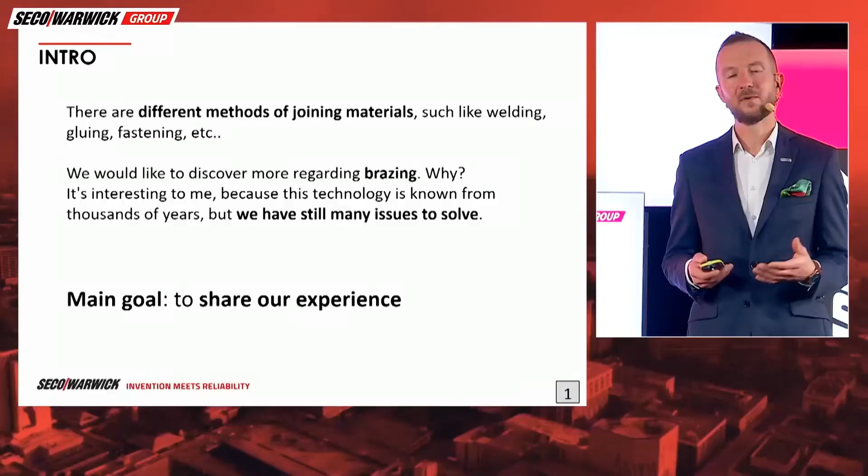What can we say? We have different methods of joining materials together: gluing, fastening, welding. But brazing is a technology known for thousands of years, yet we still have many issues to solve. Remember why we are here today: to share our experience and knowledge between us and between you, and I hope you will be happy. If you have comments or questions, please use the chat window and type them in. We will be happy to have such interaction with you.

We have a great team of experts. And who is an expert, really? I found a nice explanation according to Niels Bohr, that an expert is the person who made all possible mistakes in a very narrow field. It's a little discussive for me, so I'd like to present my personal view: an expert is a person who has experience and knowledge, but is able to share this knowledge and experience between different people. A true expert, for me, is someone I can call and always get an answer. Please remember this as we speak with our experts.

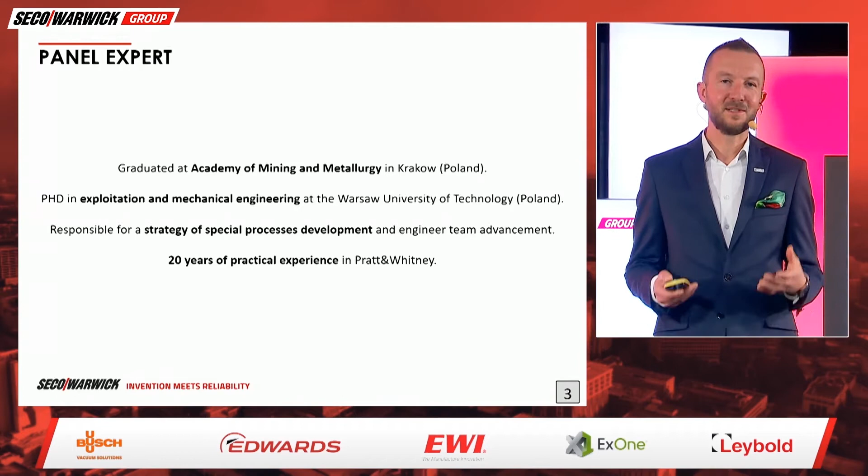So who will be in our discussion today? The first person graduated at the Academy of Mining and Metallurgy in Kraków, Poland, with a PhD degree in exploitation and mechanical engineering from Warsaw University of Technology. Today she is responsible for strategy of special processes development, with 20 years of practical experience. Ladies and gentlemen, please welcome Irena Dul.

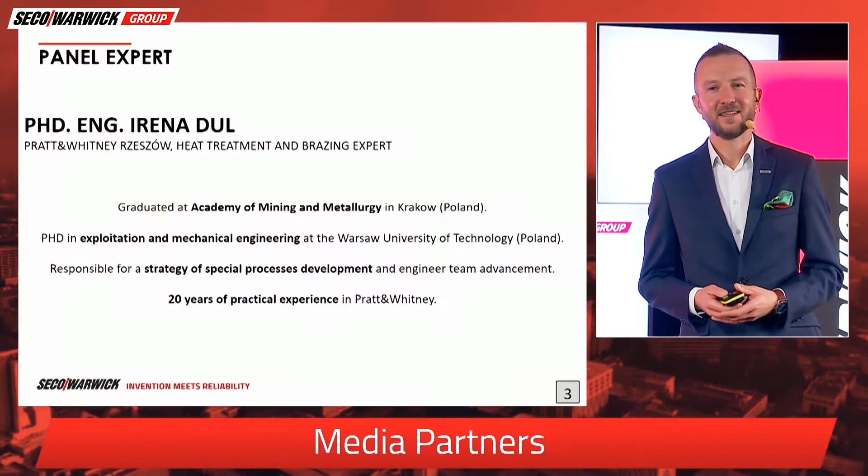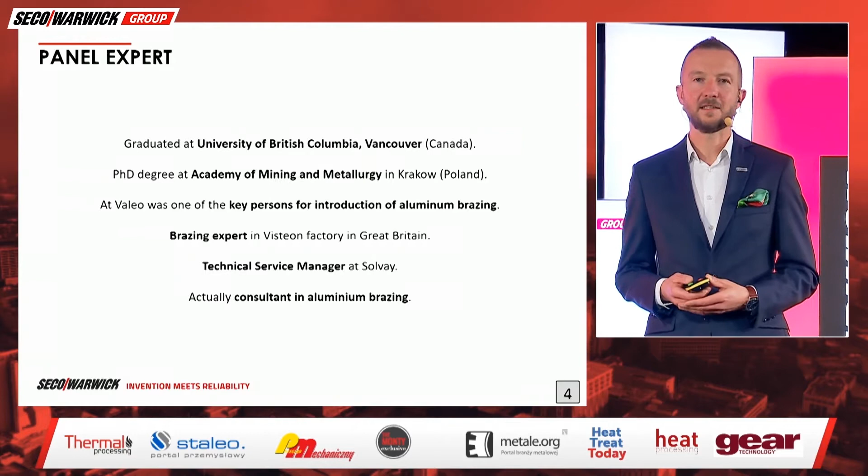The second person graduated at the University of British Columbia, Vancouver, Canada, with a PhD degree at the Academy of Mining and Metallurgy in Kraków, the same university again. At Valeo, he was the key person for introduction of aluminium brazing, then brazing expert at Visteon in Great Britain, technical service manager at Solvay, and today a consultant in aluminium brazing. Ladies and gentlemen, please welcome Leszek Orman.

Hello, Leszek. Good to see you. Hello. Hi, nice to see you. Nice to talk to you. One small remark about the definition of Niels Bohr. Please do. I think there's something in it because I've made many mistakes in my professional life — perhaps not every possible one, but many. I agree, and from my point of view, if we made a mistake, it's always the best lesson for the future. So let's keep it in this way.

Thank you, Leszek. And to complete our great team, please welcome the third person, who graduated at the Academy of Mining and Metallurgy in Kraków again. His brazing experience started at Listeman, then he joined the Warsaw Institute of Aviation, and then General Electric Company for brazing applied on gas turbine repair. It was quite the beginning of our commitment - a little strange for me at first, how to braze and repair the blades, but now I have more information about this. Today he is a global brazing engineer at Danfoss company. Ladies and gentlemen, please welcome Adam Gaik.

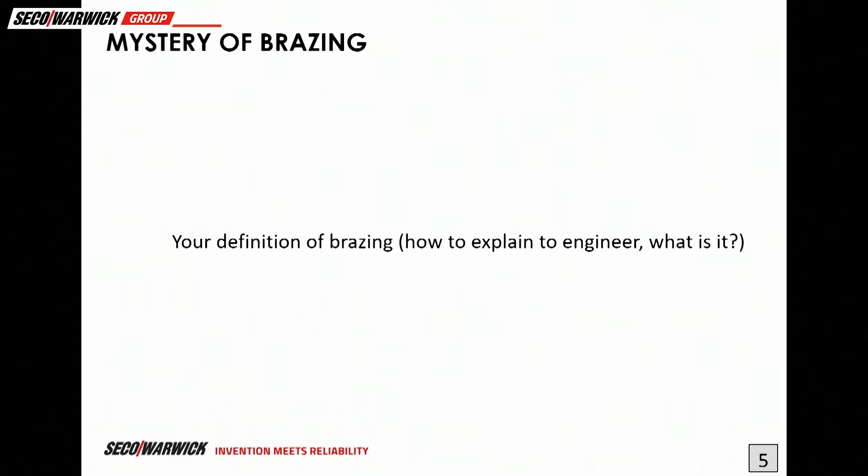So now it's time to start our technical discussion with the first question. We already discussed some things beforehand, so please remember, some questions are partially prepared, some are surprising. Let's start with the first question, because I believe we have guests who are beginners in brazing technology, and some who are real experts - it's always discussive. Let's talk about the definition of brazing: what it is, how to explain this to engineers. Leszek, can you start by saying something about this? How do you see this aspect?

Thank you. Well, brazing is a process where we join metals using a molten filler metal. On melting, the filler metal spreads between the closely fitted surfaces, and during that process some metallurgical phenomena take place. One of the most important is diffusion between the base metal and the filler metal. Diffusion means that some atoms from the base metal go into the filler metal and vice versa - some filler alloy atoms go into the base metal. Upon cooling, a metallurgical bond is formed. A very important point in the definition of brazing: the filler metal melting temperature must be below the melting range of the metals to be joined.

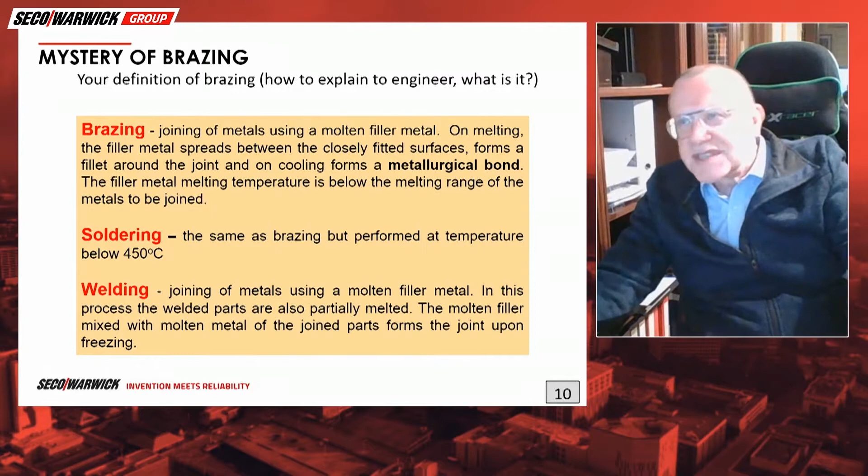If you remember, I guess I'll show you a very short movie of a furnace, which would visualize the process of furnace brazing, because normally we cannot see it since it's inside a big furnace. Before I present this movie, if you remember our pre-discussion before this panel, Irena mentioned that the critical issue is always to remember that brazing is a metallurgical bond. Am I right, Irena? Yes, exactly. It was good to remember.

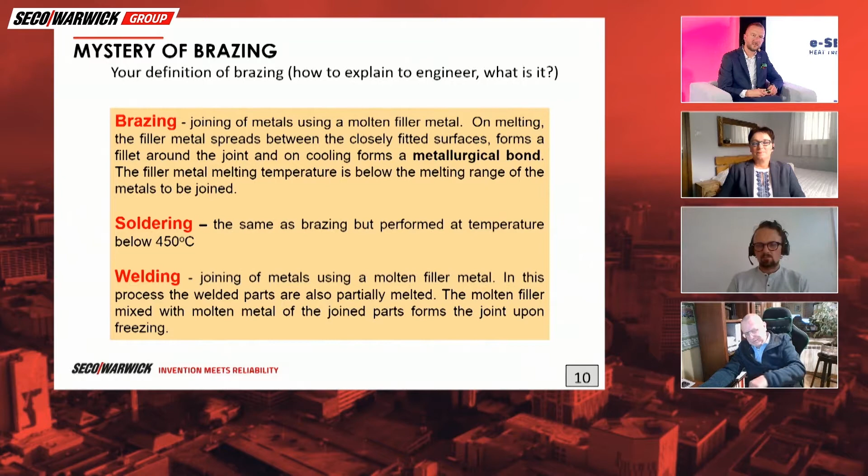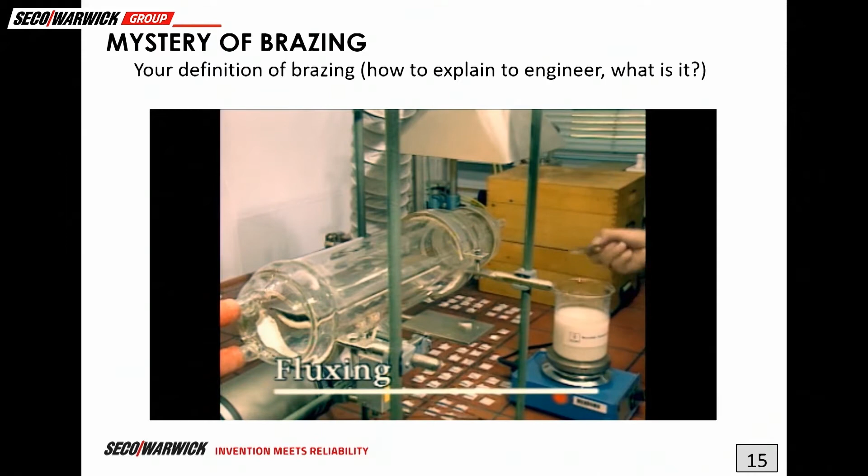In this movie, we are going to show how two elements are brazed - a small square-like coupon, 20 millimeters by 20, with an angle. For that process, we must also use flux, because flux is a factor which cleans the surface and prepares it for the filler metal to flow freely.

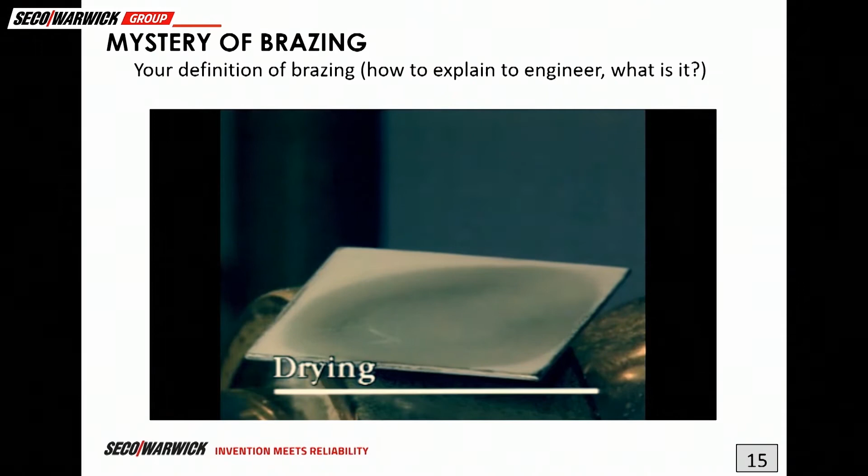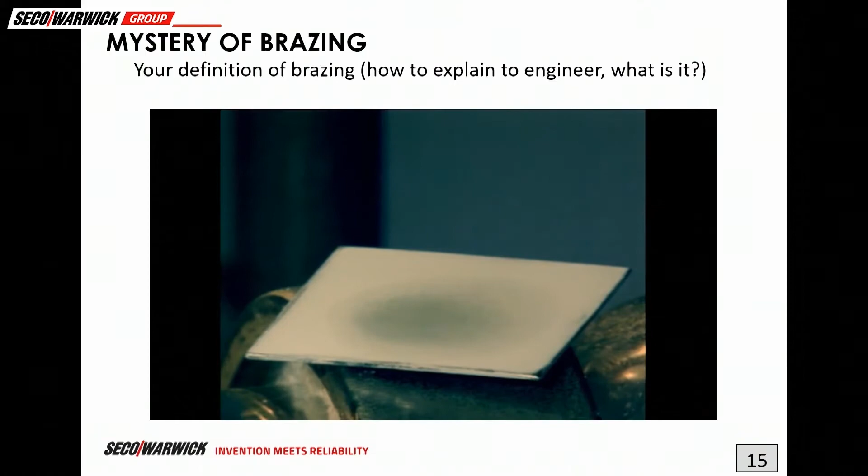Here you can see how the flux slurry is drying on the surface of the part. It's a real-time movie, and the coupon is put on top of the furnace, so you can see how it dries - this is laboratory conditions, a laboratory furnace. Flux is a substance that looks like white powder, and when it's dry, it covers the surface quite uniformly.

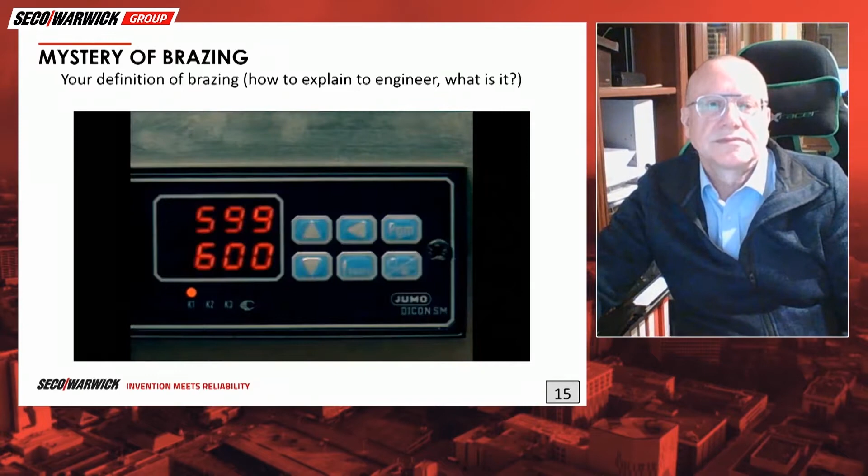Then we put the angle on top of it with a small piece of filler alloy, and we put the whole assembly inside the furnace. We set the temperature, which in the case of aluminium is 600 centigrade, and we run nitrogen through the furnace - it's important to have an inert atmosphere inside.

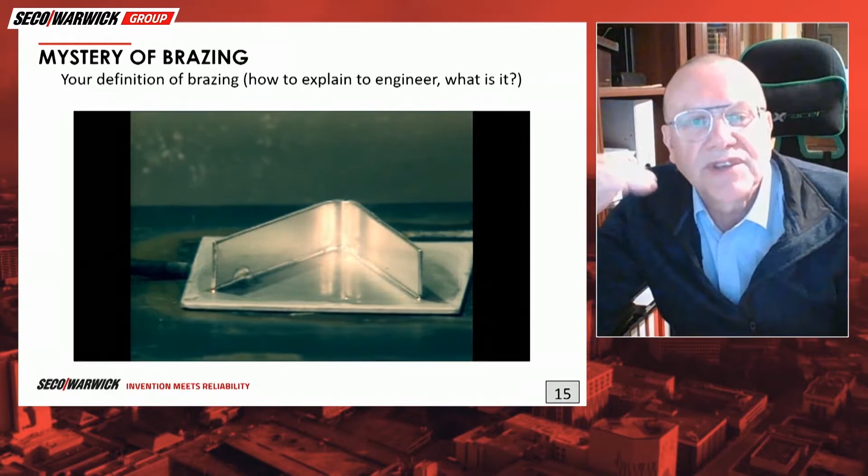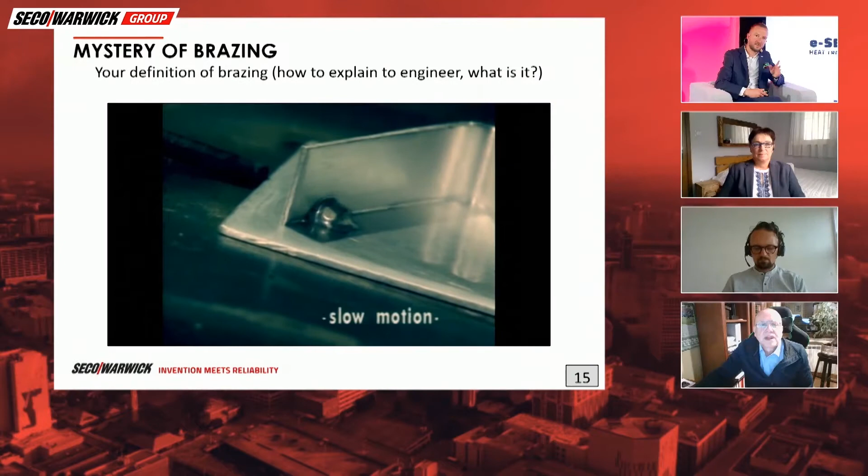Now the flux has melted and started preparing the surface. Now the filler alloy melts and flows, forming a joint. Here it is in slow motion. I must tell you, the first time I saw this movie, I was really surprised how fast it is - the filler flows and fills the joint.

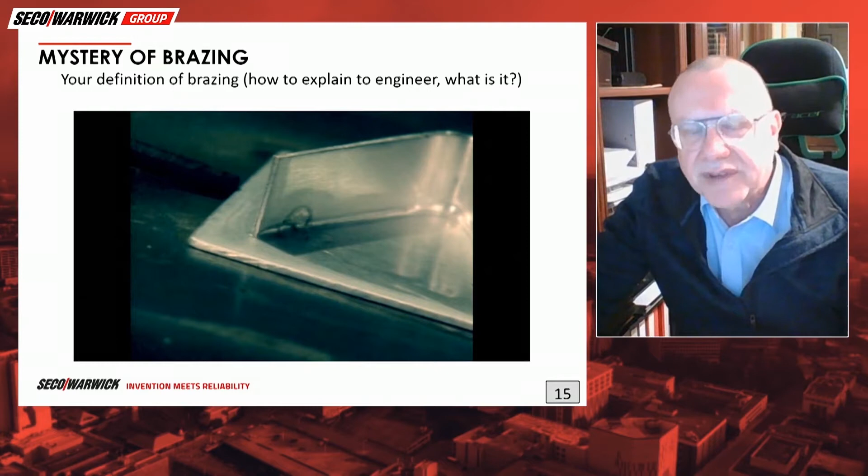Please note - now the movie is stopped, but that's okay. On the upper side of the angle, we can see a shadow, and this shadow shows how flux spreads on the surface, even against gravity. This is the key factor for success in brazing - flux must prepare, must clean the surface, must remove the oxide from it.

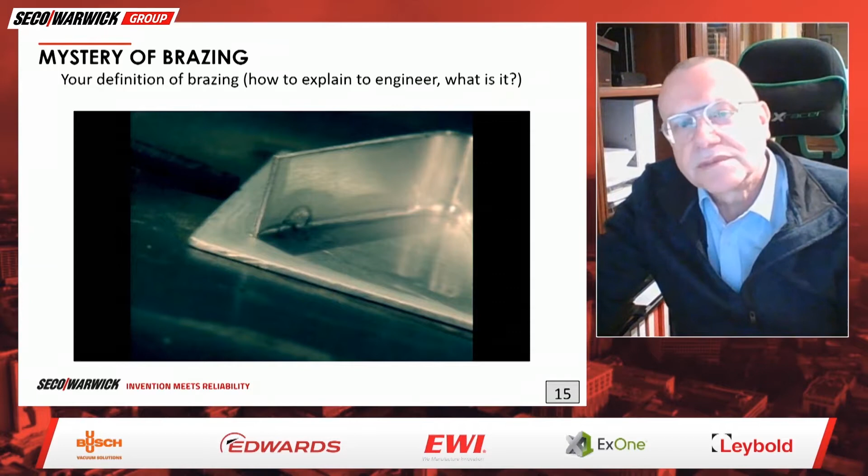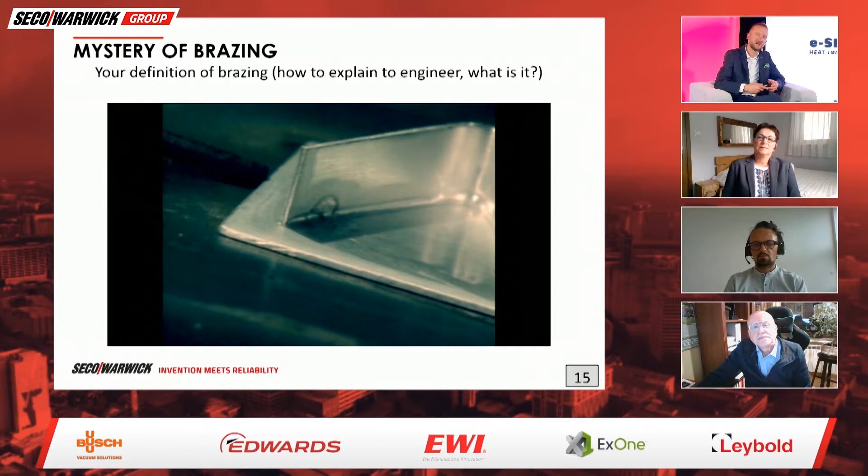Leszek, thank you very much for this explanation. What I wanted to say is that when I first saw this movie, I was extremely surprised how fast the capillary force keeps the brazing alloy inside the gap.

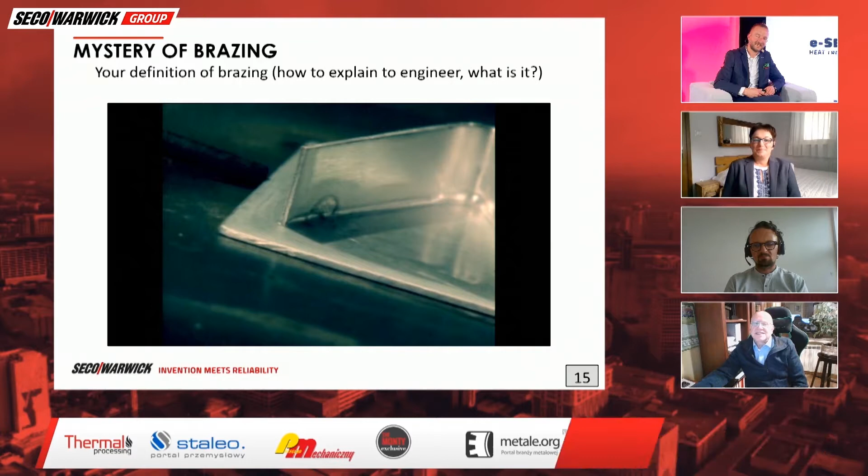This is an additional question to everyone: do you have any idea what is the speed of the brazing alloy when brazing occurs? Do we have any approximation? I never measured it, but even on this movie it was fast. I don't think we know much about it. Well, it is fast, but the real speed of brazing is actually determined by the speed of flux spreading, and that is not so fast.

Yeah, I think it's also determined by the thickness of our gap. But let's continue our discussion. Irena, Adam, have you seen anything like this before during your brazing experience? Yes, yes - maybe not exactly this movie, but I saw this during the process. Some of the processes are not done in the furnace, so you can see them outside, like here.

Yeah, induction brazing. The space is open, and you can see such phenomena.

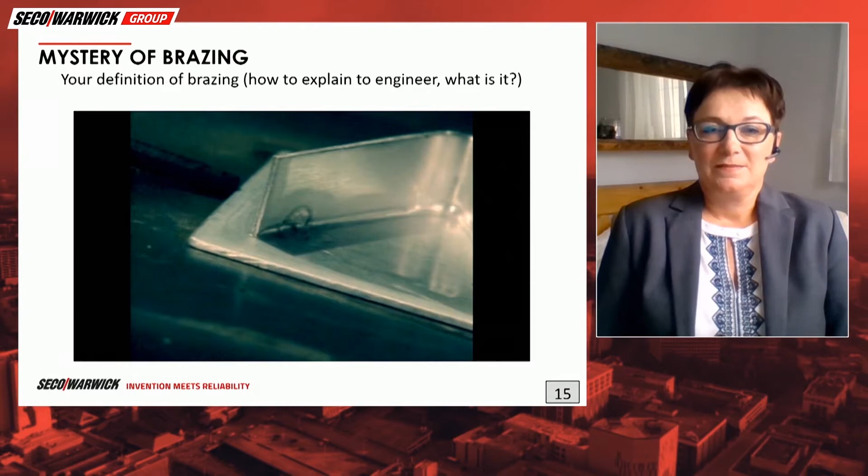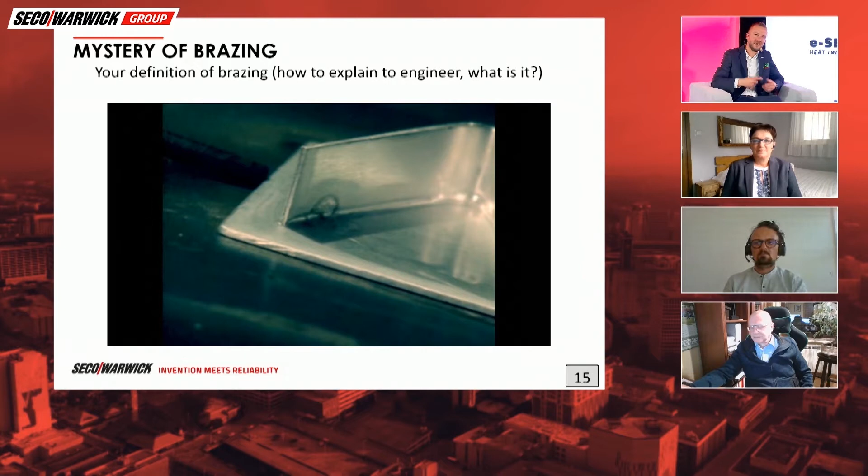It's good you mentioned induction, because it was already explained about the laboratory and the brazing furnace. But you mentioned induction - we have different methods of brazing. And when I said this is a technology known for thousands of years, we can find nice jewelry made in brazing, even in the Egypt museum. But if we can say something more about the different methods of brazing, and divide them in some way - Adam, can you do us a favor and explain it?

Yes, so brazing is a very versatile and broad technology, and you can divide it in many ways. What I did is divide it by the heating methods - what kind of heating methods we use to heat up the parts and join them. One of the oldest and most basic methods is torch brazing, where we can use different fuels to burn the torch. It's pretty versatile and manual technology, but it requires a lot of skill from the operator. It's a little bit like TIG welding, maybe a little easier, but it still requires skill and experience to use.

But can it be automated also? Yes, and there are a lot of automated machines using torch brazing.

Another package is furnace brazing, because we can have vacuum furnaces and continuous belt furnaces. They operate a little differently. Both types use some kind of protective atmosphere. In a vacuum furnace, we have much cleaner atmospheres because we can use vacuum or gases like nitrogen, hydrogen, argon - I forgot about argon there - but you start with a vacuum at the beginning, so the atmosphere you introduce is much cleaner. In continuous furnaces, we can have endothermic, exothermic atmospheres, and dissociated ammonia and nitrogen-based atmospheres.

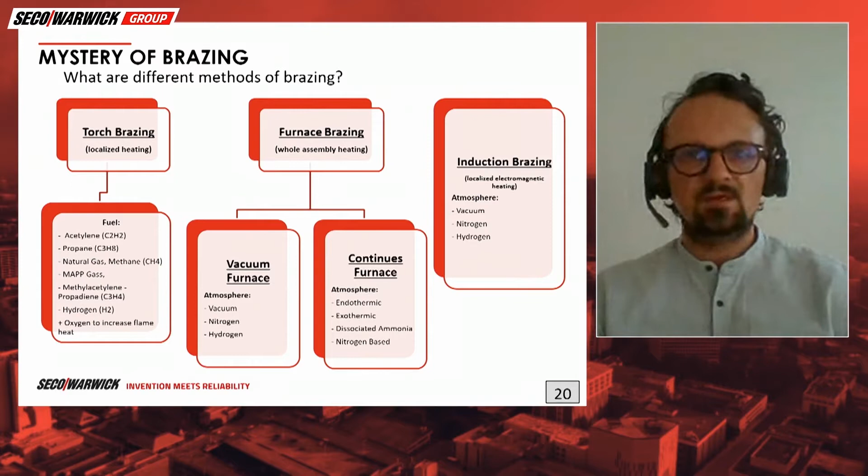You can control the process a little bit better, but it has some drawbacks - induction heating is very localized, so the joint is never heated as uniformly as in furnaces. The same situation happens with torch brazing, where we locally heat the parts. Of course, you can heat a wider space with the torch or induction, but that requires a different tool or technique. With the furnace, you heat the whole part, and the heating is very uniform, with good heat distribution, which is quite important for brazing.

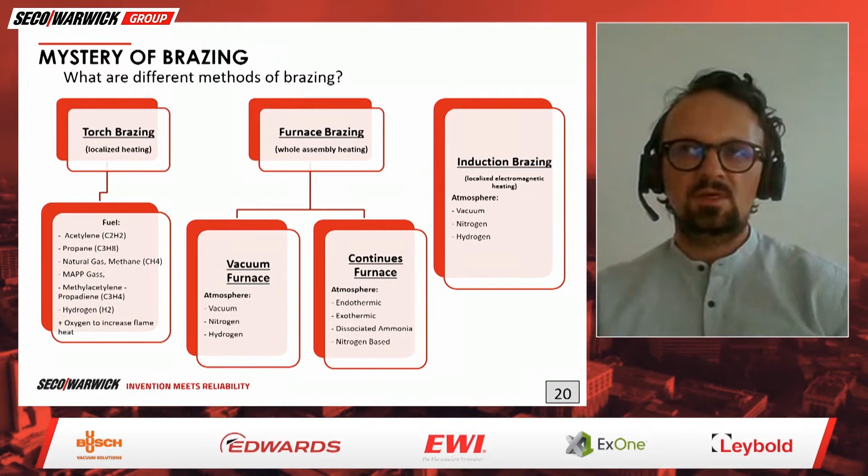As you may expect, I am a big fan of furnace brazing. Sometimes it's a benefit, sometimes it's a disadvantage, to heat the complete component together, not only the brazing place but the entire element.

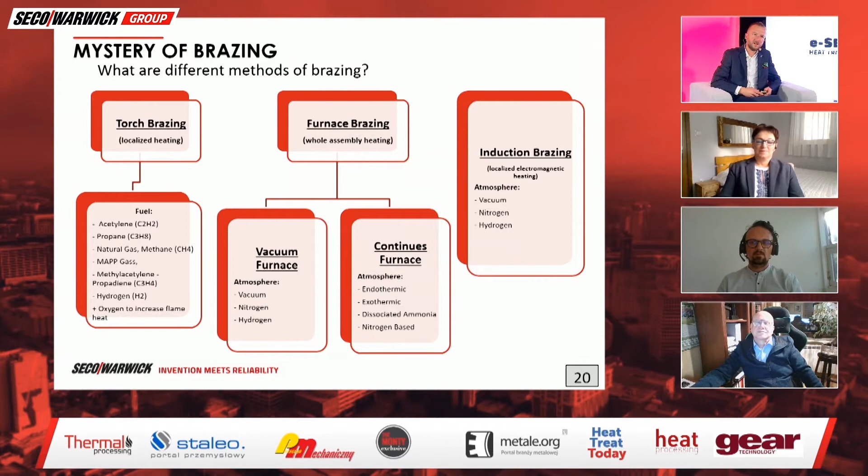But have you seen any component where, for the same part, it's possible to braze with torch brazing, furnace, and induction without any issue? Have you seen something like this, or do you not have an example?

Yeah, some in my current company where we're producing valves - some of the valves could be done with all of these methods. It depends on the size and volume we want to process, so it could be done with induction, torch, or vacuum furnace. Not all products, though - it depends on the base material we're joining - but you could use all of them on some products.

I'm asking because, of course, I would... Yeah, please, Irena. I would also like to add that induction brazing may be problematic, because sometimes the design of the coil to heat the material can be a little complicated, and sometimes furnace brazing is easier for such applications, to avoid a very complicated coil.

What do you think, Adam? Do you agree? I just heard it partially, I didn't hear the whole sentence. So Adam, I don't hear you. Yes, that was the problem. We will try to improve our connection. Irena, please repeat only to Adam.

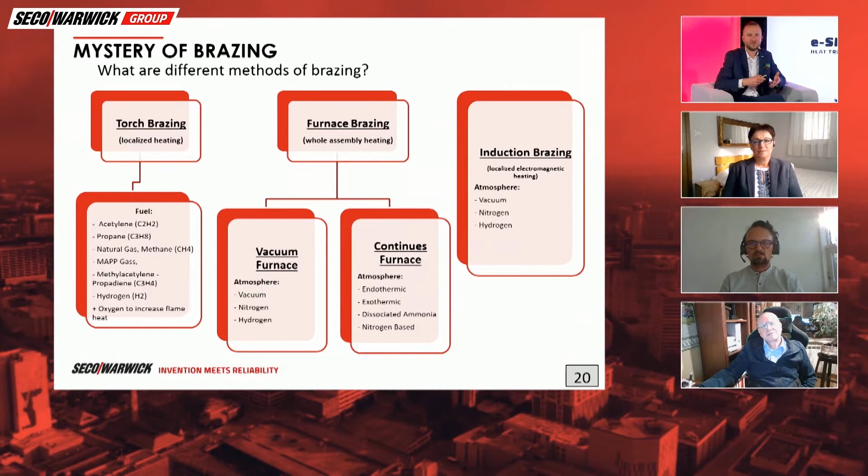Yes, thank you. And what was interesting to me was something explained by Irena, that the design has to be changed or prepared, especially for the different brazing methods. According to my experience, it's a really great challenge to have the ready produced part and then start to do brazing. Many times I see a lot of different points of view between the designer of the components and the people that have to braze these components. Can you say something about why brazing instead of welding, and which technology is for what kind of applications?

Irena, it's your turn, please share some of your experience with us. In my point of view, there is no issue about which process is better, brazing or welding. The question is which process is better for the application we have.

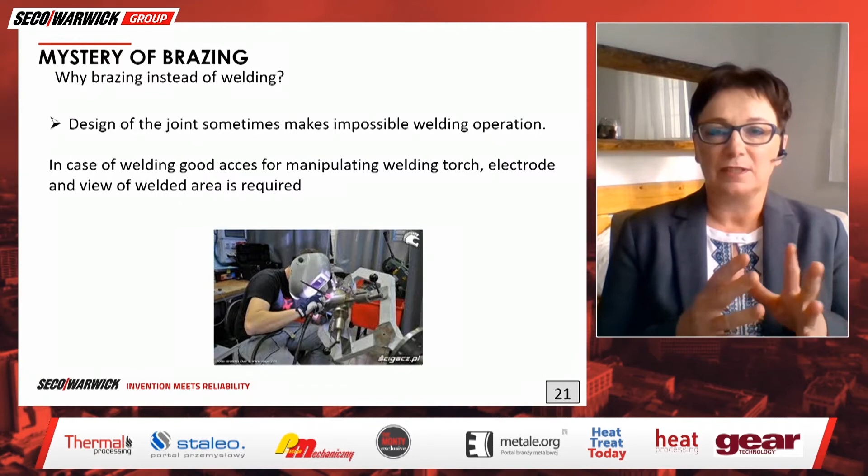Sometimes the design of the joint makes welding operation impossible. In case of welding, good access is needed for manipulating the welding torch or electrode, and we also need a very good view of the welded area. Generally, more access is needed for welding operation. So in case of limited space, brazing is easier to perform and is chosen more often than welding. So the design of the joint and limited space is sometimes better for brazing than for welding.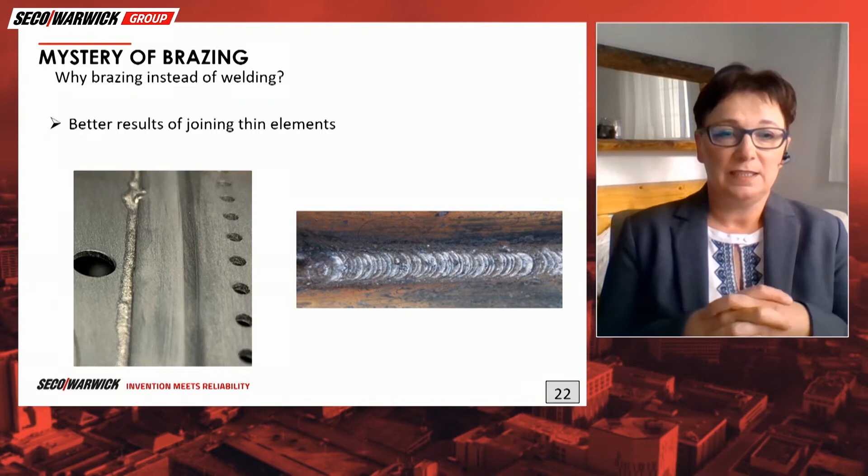Generally, for thin parts, as you see on the left side of the picture, there is a brazed joint. You can see that it's very smooth, very thin, and the quality is very good. Next slide, please.

The next advantage of brazing is the possibility of joining different materials. Welding process is dedicated only to metals. Using the brazing process, we can join metal with ceramics, for example. Of course, we have to use a special type of brazing filler metal, active brazing filler metals, but in that case we can join completely different materials with completely different properties and different coefficients of thermal expansion.

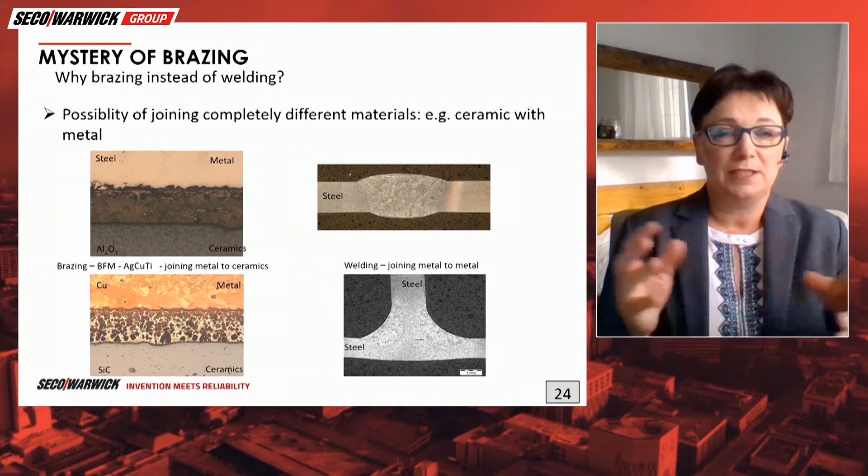And the last issue is the economic aspect. Brazing processes are generally a little bit cheaper than welding. Especially in the case of furnace brazing, we are able to do hundreds of joints at the same time, in the same operation. And the brazing process can also be combined with heat treatment. We call this concurrent heat treatment.

In parallel, of course, yes, why not. In parallel, exactly. As I showed, in that one segment is brazing, the second is concurrent heat treatment. Of course, not every brazed joint requires heat treatment, it depends on the role of the joint, the mechanical properties of the base metal, etc. But in aviation, the industry that I represent, such processing like heat treatment of the brazed joint is necessary. We do it for all parts we braze. Due to the fact that only one heating and one cooling segment is done during this concurrent brazing and heat treatment cycle, we also have less distortion.

In general, the brazing process doesn't require as much energy as welding. And even with induction flame brazing, the deformations are smaller than during the welding processes.

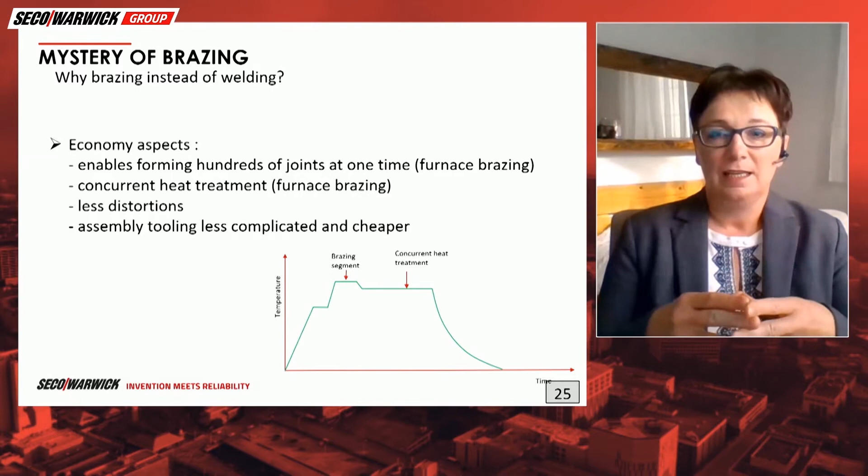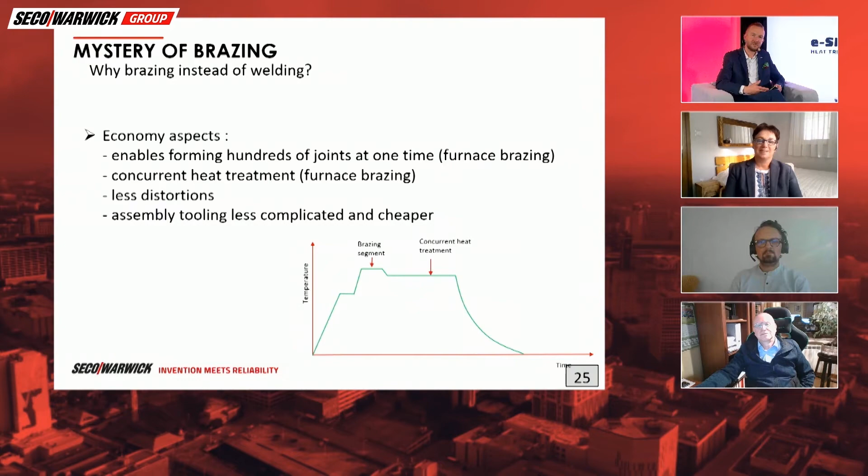When you explained that, I was just wondering if we are in the correct place, because our seminar is dedicated to heat treatment, and we try to discover the secrets of heat treatment technology, yet we speak about brazing, which is very much connected to welding. And you represent a person who works in the department of heat treatment and brazing. So this is sometimes... Yes.

In our factory, we do only furnace brazing. So the people who are responsible for heat treatment are dedicated to that process - the welding engineers are a separate group, and the brazing and heat treatment engineers are my group. Exactly, so I am responsible for both heat treatment and brazing. But this is a fact, in many companies I see brazing included in the general heat treatment department or something like this.

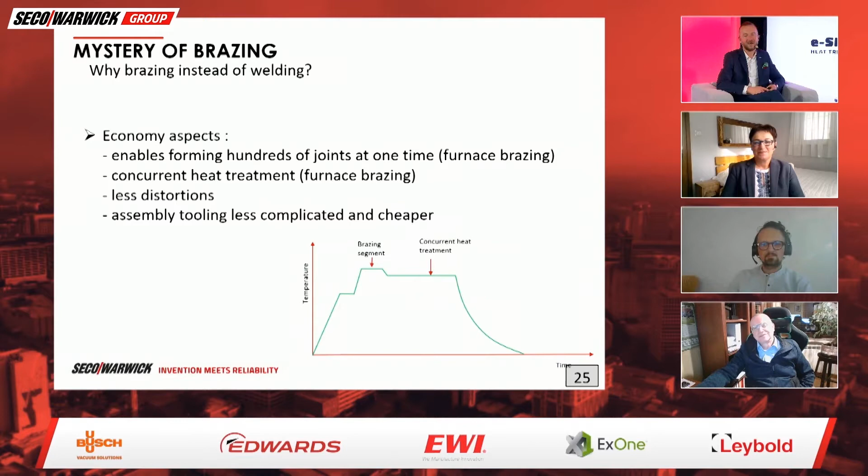Just before this discussion panel, I received a question, again maybe not for the first time, about the possibility of mixing different brazing processes in the same furnace. For example, having some heat exchangers brazed by copper, and whether it's possible to also braze heat exchangers with nickel in the same equipment, or even more sophisticated, or let's say a stranger requirement, to use the same furnace for stainless steel brazing and aluminium brazing. Maybe you can say something about this aspect, Adam.

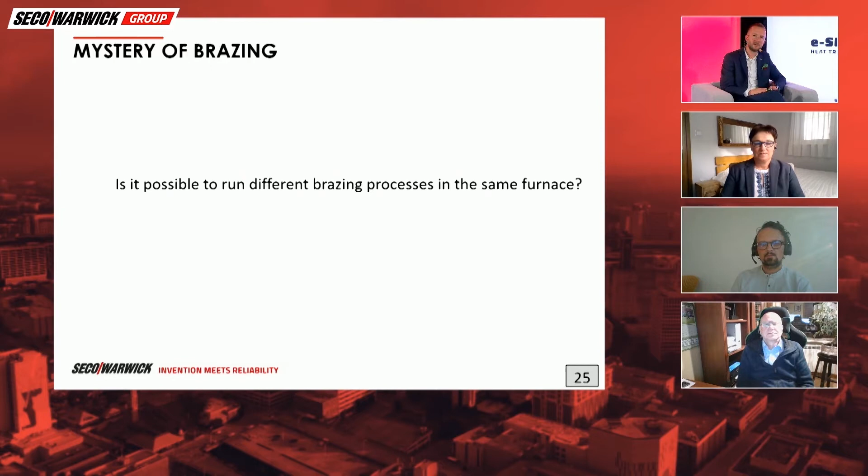Yes. So the answer is yes and no, because it depends. When we want to mix parts made out of the same base material - what do you mean, that we want to braze stainless steel with copper and stainless steel with nickel? The answer would be yes, you can mix that.

However, after the process with nickel, it would be good to make the burnout, which is the process of just burning out the leftovers of the nickel, before brazing with copper. And it depends on the nickel alloy, but one of the most popular, BNi2, has a lower melting point than copper.

Now, if you want to mix different base materials in the same furnace - for example, stainless steel and then aluminium - the aluminium would require a little bit different furnace because we have totally different melting points of the base materials. The other thing is, if you would like to braze brass in a vacuum furnace, it's the same - no, because you cannot braze brass in a vacuum furnace due to the evaporation of the zinc.

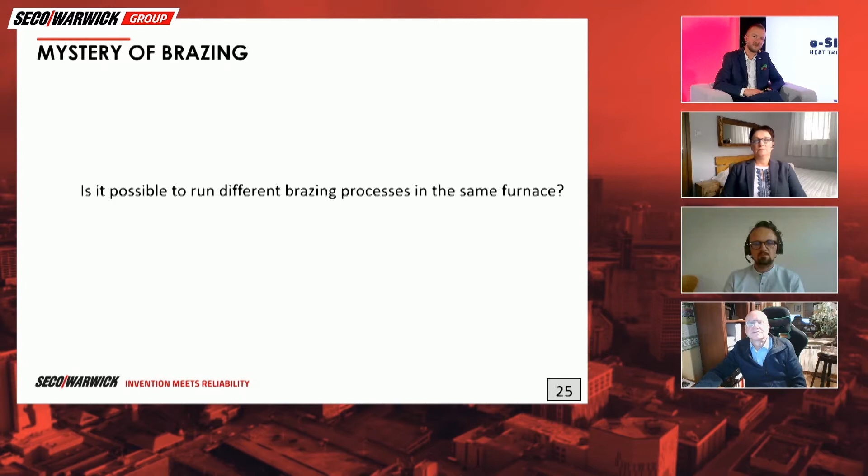So as I said in the beginning, it is possible, but sometimes from the economical standpoint it doesn't make sense. Of course it's better to have a dedicated vacuum furnace for one process, then you don't have to make these burnouts and remove the unnecessary leftovers during brazing. So the answer is it is possible, but it depends.

It depends, exactly. Adam, thank you so much. The next question we have. May I have one additional remark? Please do, Leszek, on condition it will be short.

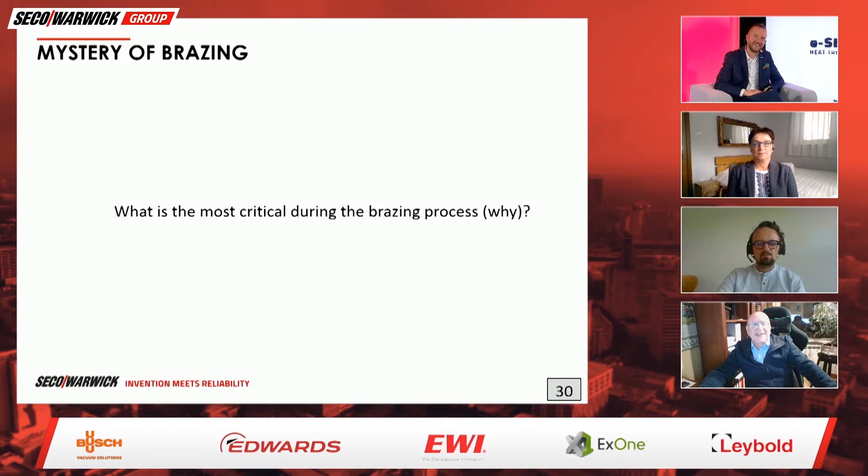This remark is not really about the furnaces, but about the process. If you braze aluminium and copper, and in the same factory you have production in copper and brass, make sure copper never gets into the production hall of aluminium. I've seen cases where an operator had gloves contaminated with copper chips and was sent to assemble aluminium parts. Then all of a sudden the aluminium parts were burned through, with tiny holes caused by copper chips left on the part, because copper will dissolve aluminium during brazing. So when you have two productions, copper and aluminium, in one factory, they must be totally separated from each other.

Yes, it's a good point. It's a good point to remember to not only wash our hands properly, but to have clean parts and environment in the factory when brazing different metals and different brazing alloys. Okay, so the next question.

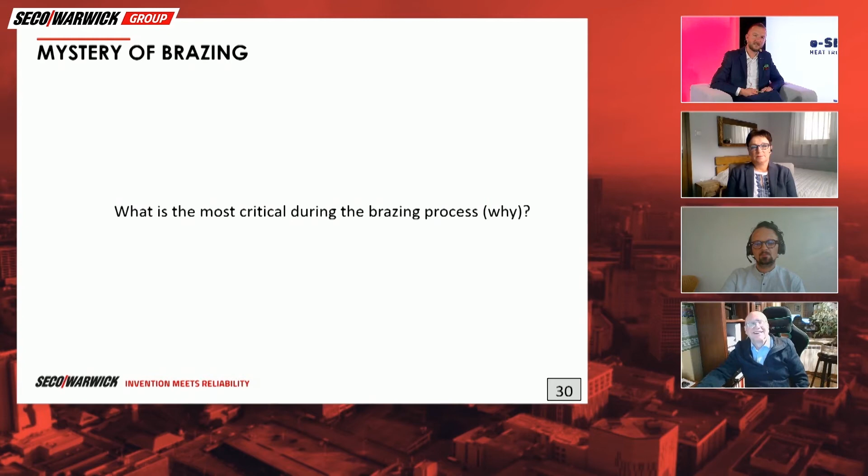Thank you, Leszek. The next question is about the most critical brazing aspects. Leszek, if you've already started, please continue and explain this to us. Well, basically I must say at the beginning that my experience is connected with brazing of aluminium, but nevertheless I distinguish five major factors for brazing: temperature, flux load and its uniformity, furnace atmosphere, joint geometry, and cleanliness.

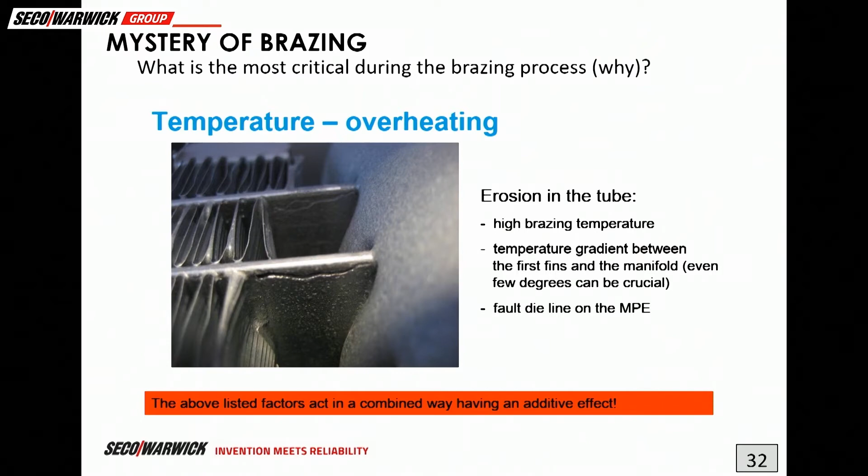When we talk about temperature, I would like to show you a few examples of what happens when the temperature is too high. This is a car radiator, and you can see a line on the tube caused by flowing filler alloy towards the fin. That flowing filler alloy dissolved the material of the tube and created a hole in it, a total reject. Such things can be caused by high temperature, also by a temperature gradient between the first fin and the manifold, or by the so-called fault die line on a multi-port extrusion tube.

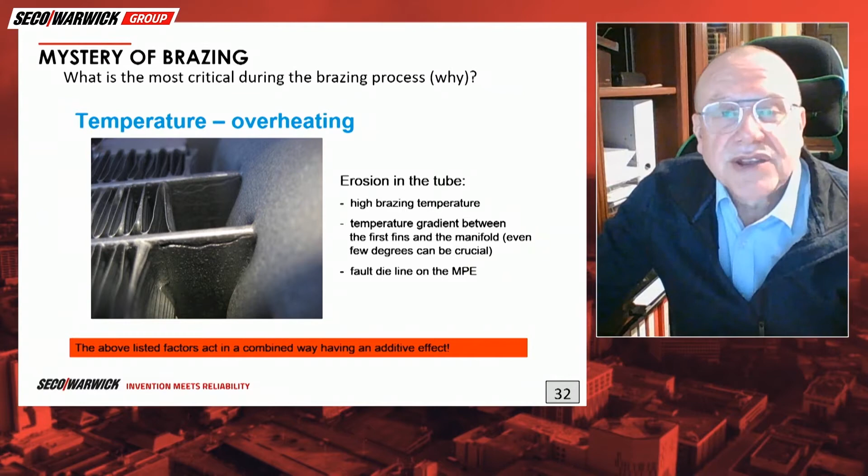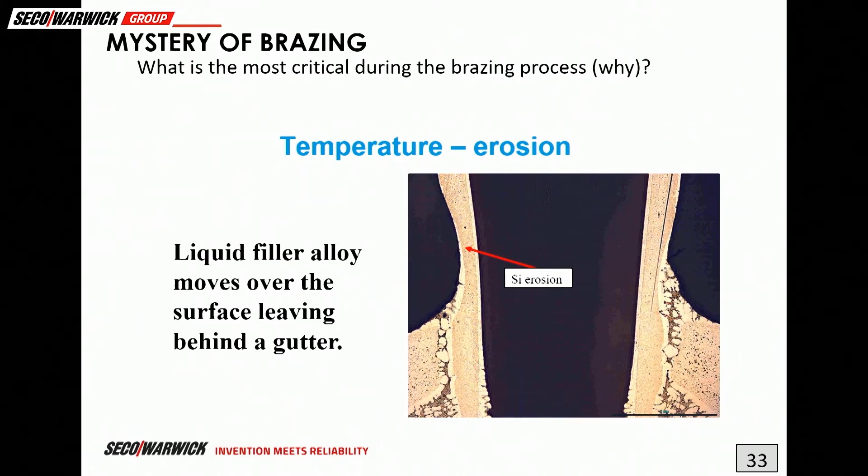Another example of the temperature problem is connected with the so-called erosion. During brazing, when we have a liquid filler alloy, it can interact with the base metal, and sometimes upon cooling the filler metal flows away, leaving the base metal with much thinner gauge. This asks for problems, because such a part will not have sufficient strength, and it will also be susceptible to corrosion because of the thinner gauge. So the point is to try to avoid brazing at too high a temperature.

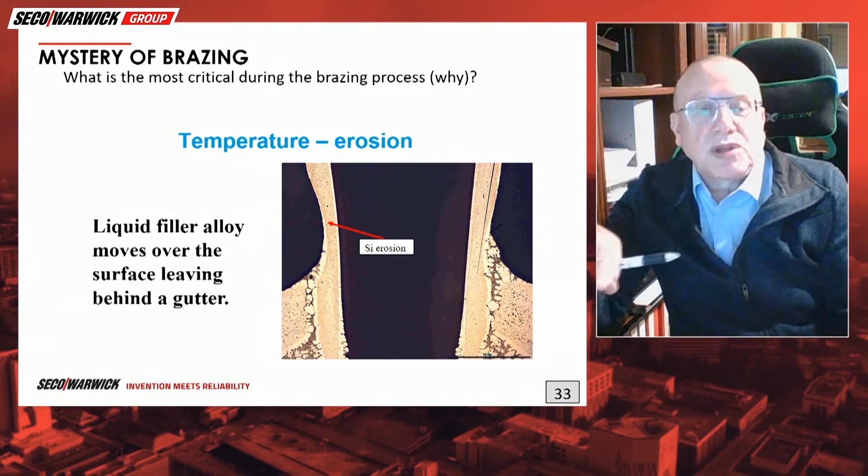Temperature control should always allow the filler alloy to be molten, while the base metal remains solid. The next point is flux load and its uniformity. Flux, as I mentioned at the beginning, is needed for cleaning the surface. Every metal surface is coated with oxide, and that oxide must be removed in order to create the metallurgical bond between the filler alloy and the base metal.

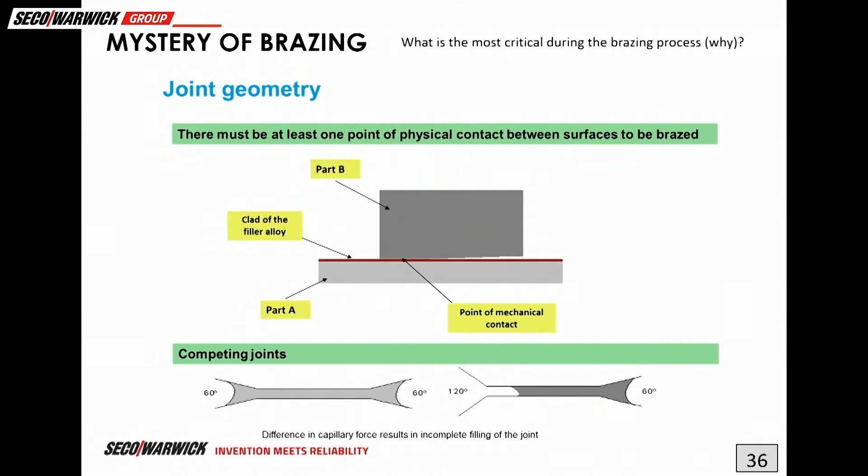Fluxing is actually a separate field, and it's a very important process. But one key thing is that flux should be distributed on the surface uniformly and with the required load. Regarding flux, do I have the correct understanding that it's mostly reserved for aluminium brazing? Yes, but also for cupro braze you need flux, right? Yes.

The next factor is furnace atmosphere. Again, I'm talking about furnace brazing, and here we can have either vacuum furnaces or continuous furnaces. With continuous furnaces, we have the ends of the muffles, which could be as much as 20 meters long, open, and we pump in inert gas. The flow of that inert gas decides the content of oxygen inside the brazing zone.

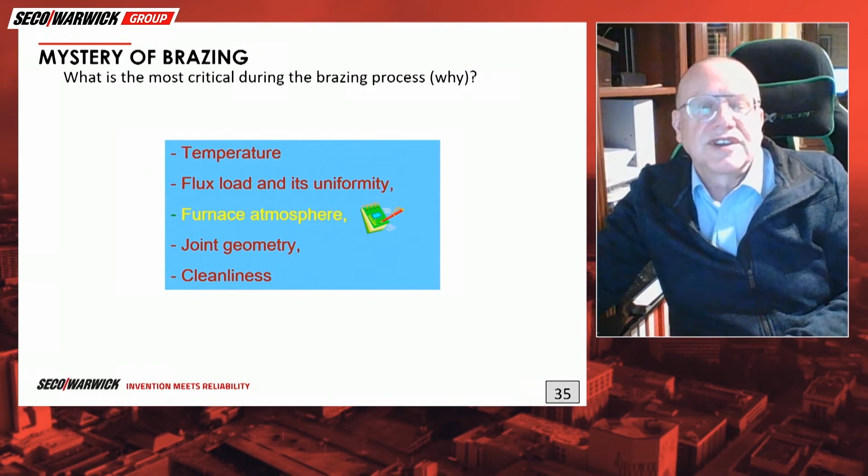When something is wrong with the distribution of the gas, the furnace atmosphere is bad and we have no braze, or the parts look not very nice.

The fourth factor is joint geometry.

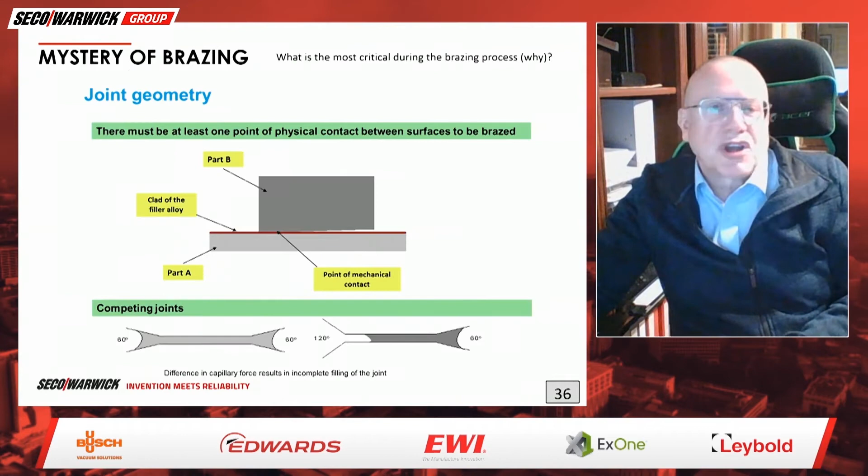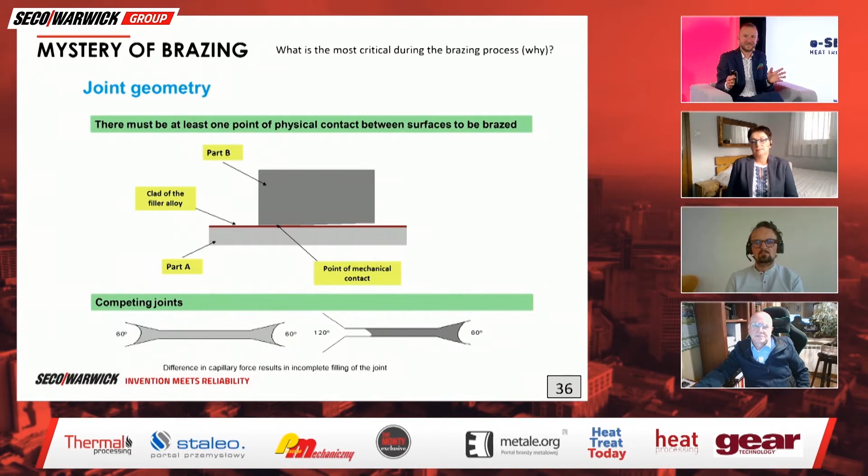By the way, Leszek, if I can interrupt you, from the furnace point of view, according to our experience, there are different types of furnaces. From the first time, they look completely different, but also dedicated for brazing. Comparing the aluminium brazing furnace to, for example, a small laboratory furnace, there are two different types of equipment, but still dedicated to brazing. And why I'm saying this - it's unbelievable for me how the creativity of people is for brazing. Even from the historical point of view, where in ancient times people also made brazing joints in completely different methods. Basically, the goal is the same.

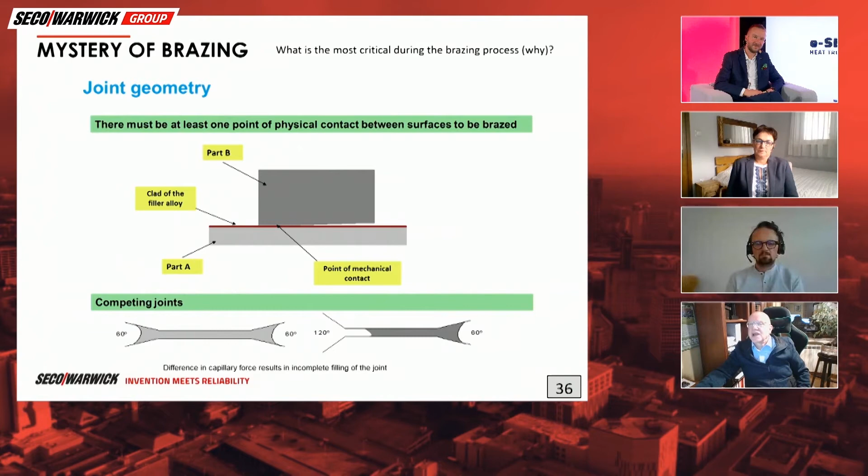At least for aluminium brazing, but not only, we need to have an atmosphere which is oxygen free. And you mentioned something about joint geometry - so right, I interrupted you, please continue. Next parameter, which can be very complicated, but there is one general rule about joint geometry: there must be at least one point of physical contact between surfaces to be brazed. Or speaking colloquially, a filler alloy can flow on the surface, but it cannot jump. So somewhere a designer must make sure that at some point of the joint length, there must be a direct physical contact between two brazed parts.

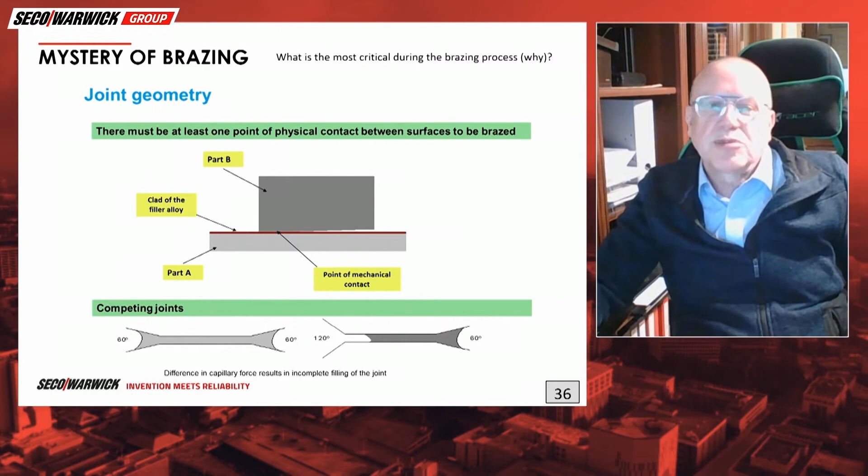Another important factor for designers is the so-called competing joints. Capillary force is a function of the gap between the parts, but also of the angle, shown here in this drawing. Actually, this is not the slide I want now - sorry, okay, this is the one below. A more open angle will create a smaller force to pull the metal into the end of the joint. Such a situation shows that we have the so-called competing joints - filler alloy will tend to flow to the right and not to the left. This is also very important when you design the parts. Please, next slide.

Okay, here we have an example of a filler alloy trap. A filler alloy trap is a place where we have a preferential clad flow, and due to that preferential clad flow, we can reduce the amount of available clad in the joint. A typical example, or a very common example of such a case, is a radiator, a car radiator with the so-called B-type tube, where the tube is folded into such a shape where we have a small delta region. From that place, the filler alloy is drawn into the gaps between the tube and header, and between the tube legs. If we do not keep this open area, this delta region, small, we will end up with a fault, as shown here on the microscopic picture on the right.

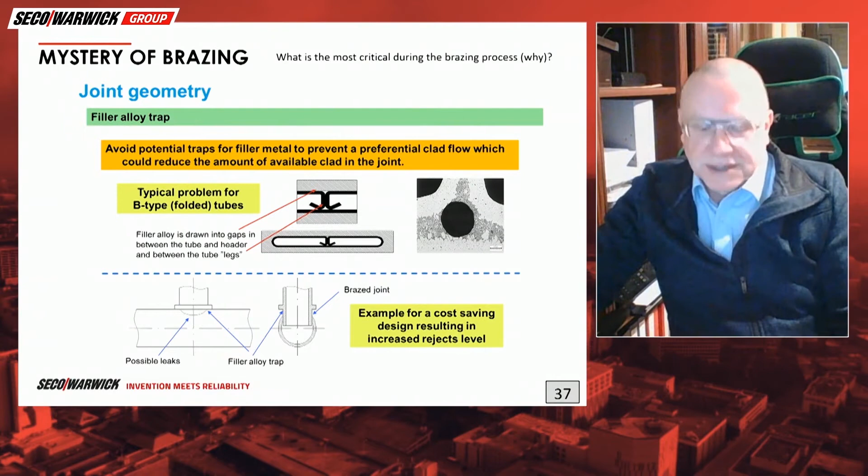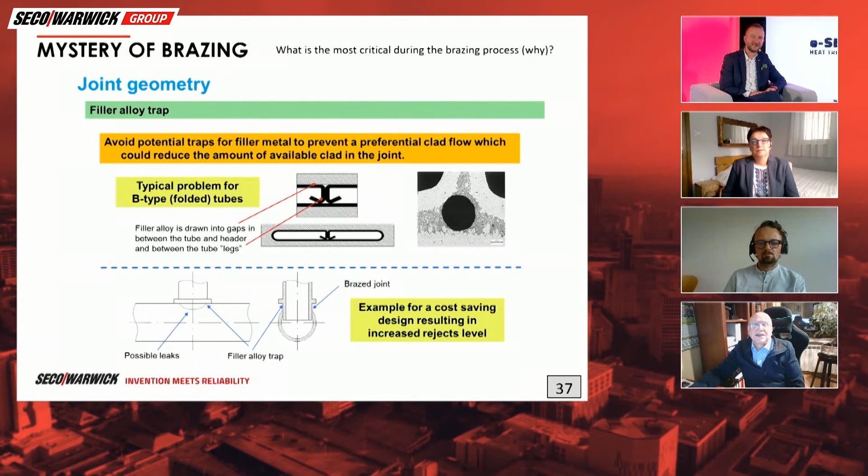Another example of a filler alloy trap we have here below, where we have a round tube with a round connector. In this case, we created a filler alloy trap - a right angle, shown here by the blue arrows. We obtain possible leaks in the middle of the joint, because most of the filler alloy flows into the corner between the collar of the tube and the round manifold. It's a typical example of cost-saving design done by an engineer who doesn't know much about brazing, which results in increased reject levels. This is true - many times it's the difference between, let's say, economical design and proper design.

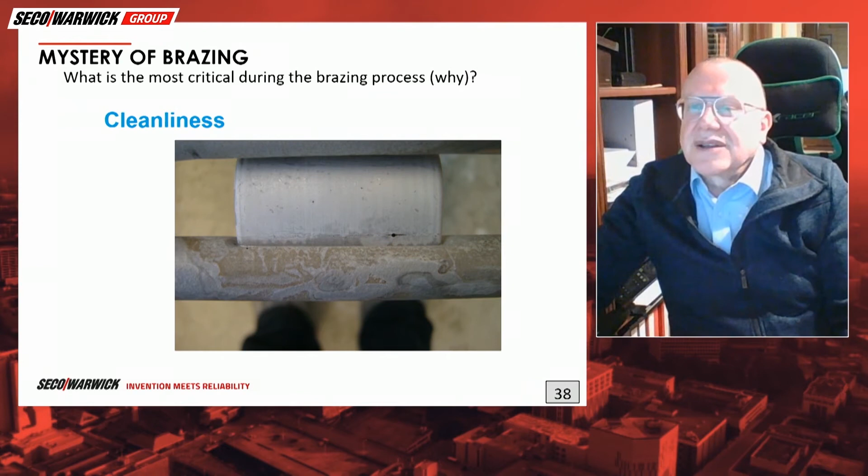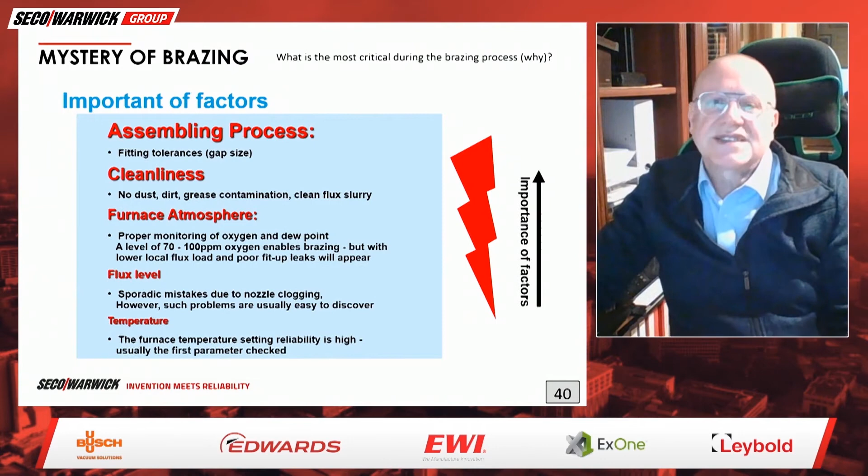Of course, very important. In the last slide, as a summary, I would like to show you the importance of those factors. Here there is some kind of practical paradox, because when we look at the continuous brazing process, the last element we have is the furnace. After the furnace, the part is tested for tightness - is it leak-free or not? And we discover that it is not. So the first natural question would be: do we have the temperature in the furnace right?

And this is a wrong question. Because when we look at this slide, and this is based on...

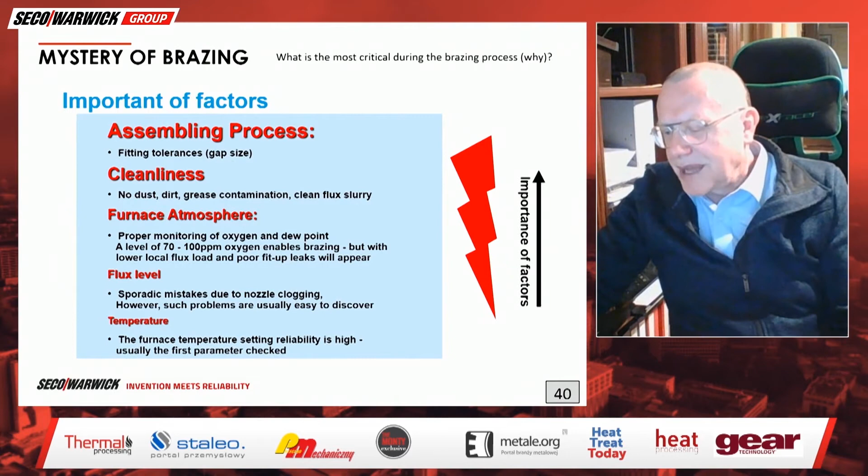my many years of experience analyzing statistical data, the major source of brazing faults is in the assembling process. Gap size mainly, fitting tolerances. Then cleanliness - quite often the parts are not perfectly clean in real life.

The next factor, furnace atmosphere. We usually have proper monitoring of oxygen and dew point. And when we have the right level of oxygen - again, this is the value for aluminium brazing - we will have no problem.

Then flux level, the next factor. Sometimes we can have sporadic mistakes due to nozzle clogging or other problems with application of flux. However, such problems are usually easy to discover.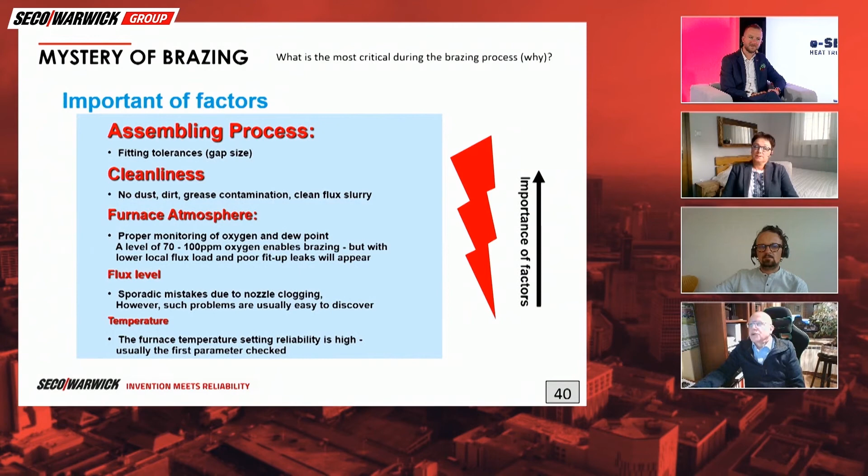And the temperature is the factor which is the least frequent root cause of the fault. That's simply because the furnace temperature setting reliability is high.

That's my opinion about Seco/Warwick. Usually, but usually it is the first parameter which is checked. So remember, assembling process is the most important one when you braze different parts.

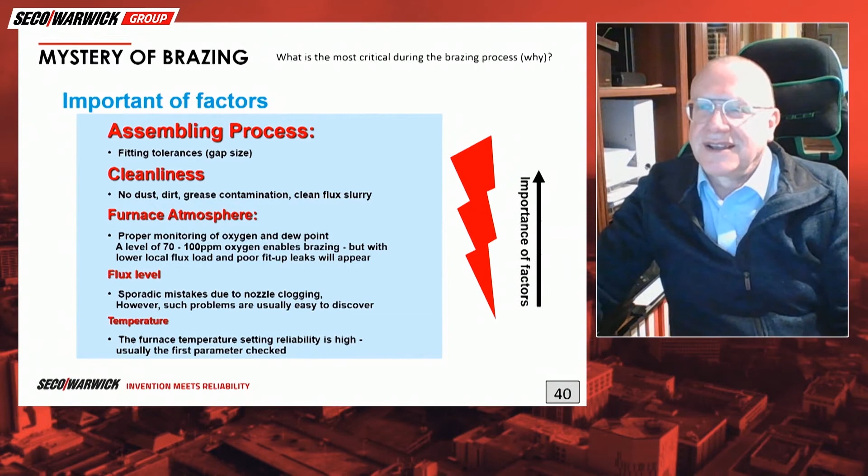It's interesting, and I think it's great to see the importance factors from the most important to the last. But in my opinion, it's also the complexity of this process. So the complexity is important. Perhaps actually saying importance is not really proper - it's the frequency of root causes. Yes, yes, Leszek, thank you so much.

And you mentioned about the temperature control, and in heat treatment and brazing, there is another factor - it's temperature and time. Today I'm responsible also for the time keeping, so I have to switch to the next question. Thank you for the answer.

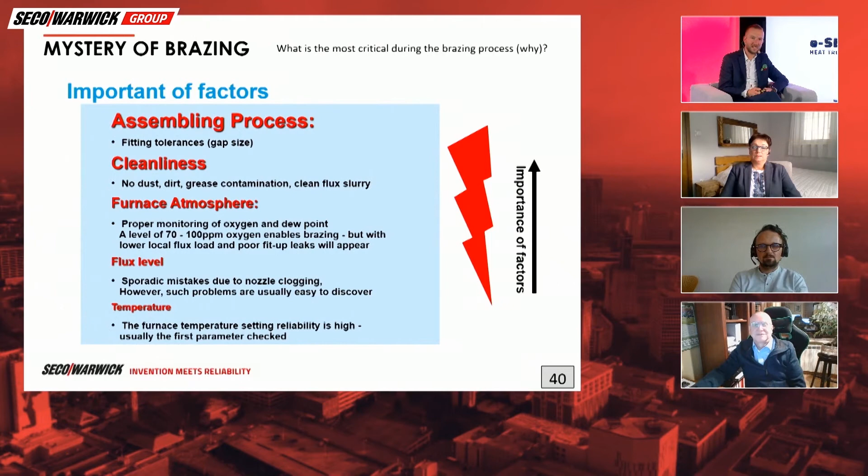And the next question, which is about what are the criteria and approval methods of brazing joints? Because it's of course important to know how to make the brazing, but it's also important to know how to check and verify if we made a correct or wrong process. So now I give the voice to Adam. Adam, please share your experience about this.

Okay, so this is again a very open question in terms of brazing, because brazing is, as you could see, a very versatile and broad technology. But before we start talking about the criteria, I would like to start talking about the imperfections that we'll see, because then we can set up some kind of criteria against these imperfections, and we can divide imperfections into external and internal.

By external, I mean everything that you can see by your naked eye, that it's outside on the joint, on the base material. And internal is what we have inside the joint - like when we're making the cross-section or peel-off tests, we could see what's inside and what kind of imperfections we'll face.

So I put it on the slide, a couple of common imperfections that we could see during brazing. And for external, it's discoloration, incomplete fillet, cracks, and localized melting. And it depends what kind of products we want to make.

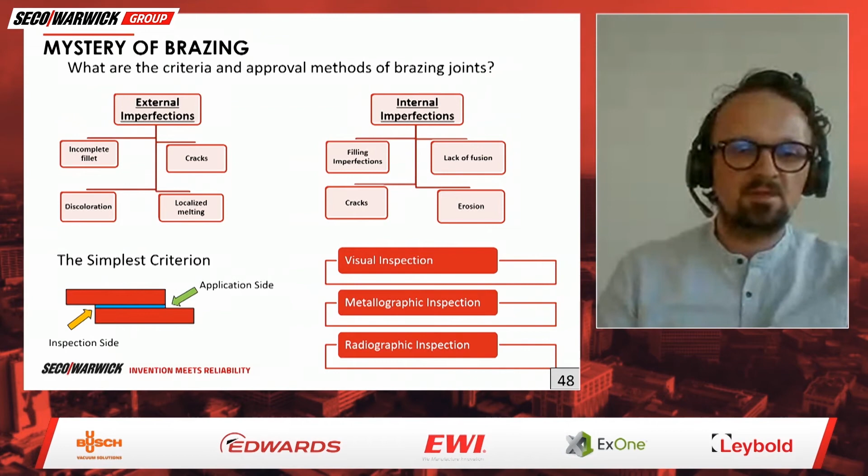Cracks, obviously, most of the time no cracks are allowed, but there are still a couple of cases where we could accept cracks, though that's not very popular. Localized melting, most of the time it's no-go - we just melted base material, and as Leszek mentioned, we could see this erosion, which is kind of localized melting. That's the imperfection. So it depends what kind of products we want to produce and what the customer will be willing to accept.

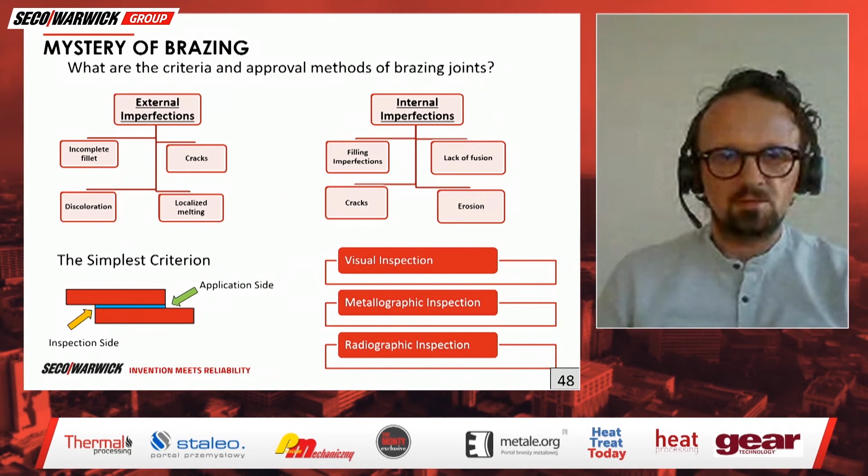That's the other thing. For internal imperfections, you can set up some kind of goals for it. For filling imperfections, for example, one of the most common criteria - maybe not famous, but common - is that we allow 20% of the joint to have the imperfection. So for example, if we cut up the joint and we see some imperfections, the area filled by the filler metal should be more than 80%.

You could go deeper into that and see what's the type of the joint, if it's an overlap joint, what kind of overlap we have—3 times the thickness, 6 times the thickness—and set up the criteria against that, and what strength we require.

Lack of fusion, obviously, that's a no-go, because if you have oxides on the surface, as Leszek mentioned, we might see lack of fusion, because the braze alloy won't spread on the surface and there's no stickiness. Cracks, obviously, that's no-go. Erosion, it depends.

With erosion, you might see some erosion that isn't a big deal, or sometimes erosion/diffusion is used as a joining technique—heating up so long that we erode the base material, mixing it with the braze alloy to create a very strong joint. But that's different.

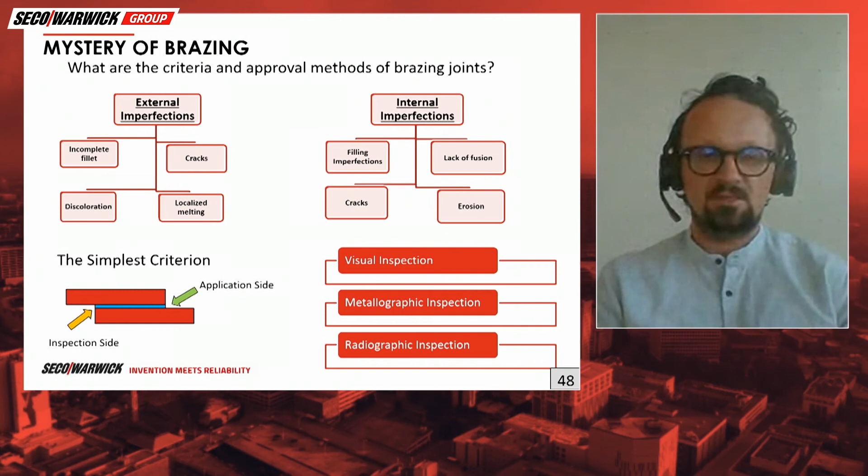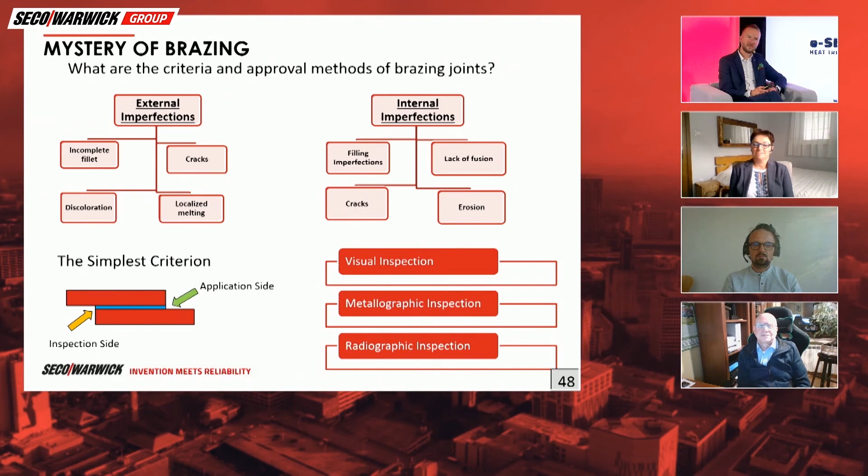Adam, thank you so much, that was a great explanation. Let's go, if I remember, to the last question, about experience with staff training and their qualification. As we can imagine, it's not so easy—you mentioned torch brazing, for example, where the manual work is hard to make repeatable. The same applies to control, verification, and experience of staff. So Irena, what's your point of view on this aspect?

The main point of view is very easy: the quality of the brazed joint strongly depends on the skills of the personnel performing these operations—not only the brazing operation, but all activities needed to design and perform good joints: assembling, cleaning, everything. The personnel doing this process must know all these rules.

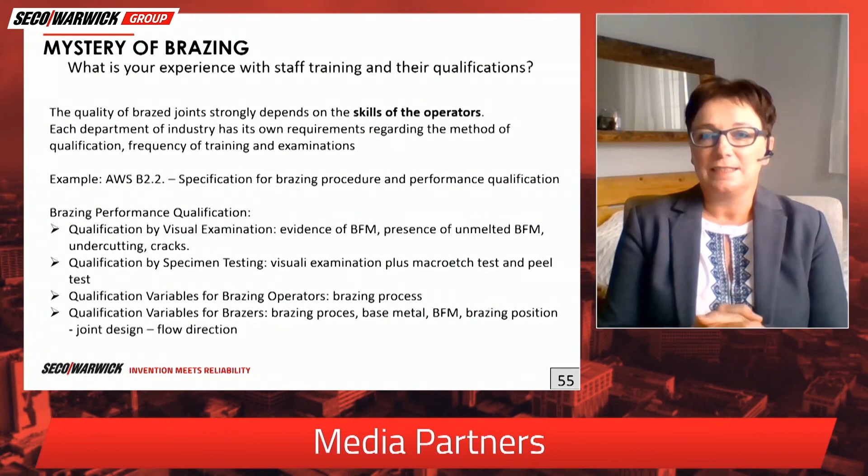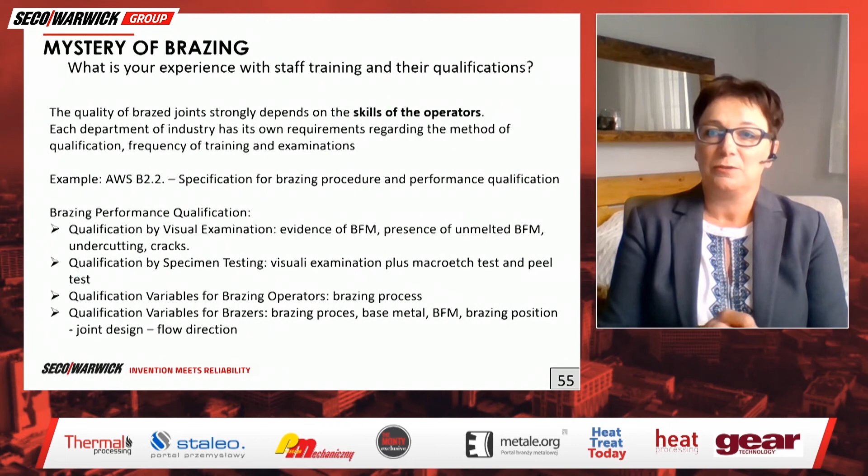I would say it's difficult to make a good brazed joint and qualify it, as per Adam's earlier slides, if our staff is unskilled. Each sector of industry has its own requirements regarding the method of qualification, the frequency of training, and exams conducted for operators and for personnel.

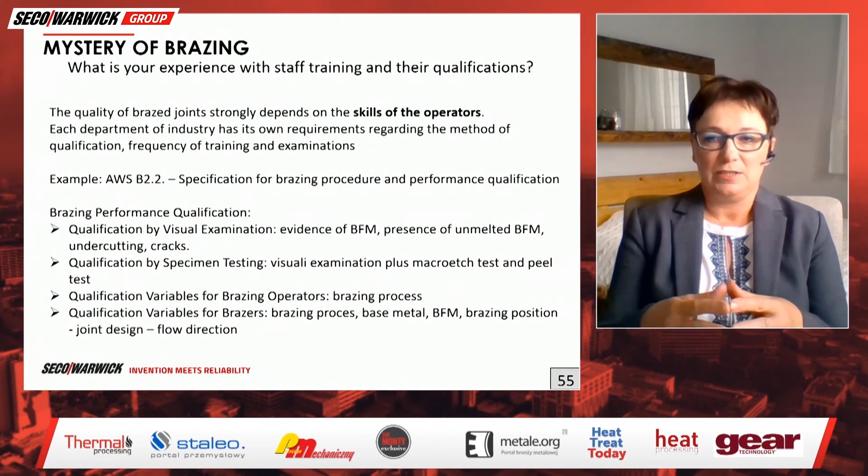Personnel can be divided into two definitions. The first is the brazer. Brazer performance qualification tests determine the ability of a brazer to make sound brazed joints following a brazing procedure specification, the written technology, under conditions encountered in production. So the brazer includes all people doing assembling, taking care of clearance, and applying brazing filler metal like foil or paste.

The second group is the brazing operator. Brazing operator performance qualification tests determine the ability of brazing operators to operate furnace, mechanized, or automatic brazing equipment in accordance with the written procedure.

There is a very detailed specification, AWS, American Welding Society B2.2, which very clearly defines how to qualify joints and process and how to qualify the staff. And I would say that brazing performance qualification may be done in two ways.

The first is, similar as Adam said, visual examination. So we have to check evidence of brazing filler metal, brazing line, presence of unmelted brazing filler metal, undercutting, cracks, erosion, etc. The second, more detailed, is qualification by specimen testing, so visual examination plus macroetch test of the samples and peel test. Peel test we use to evaluate the coverage, the filling of the joint. This test will show also internal discontinuity, internal voids, pores, cracks, inclusions, and level of coverage.

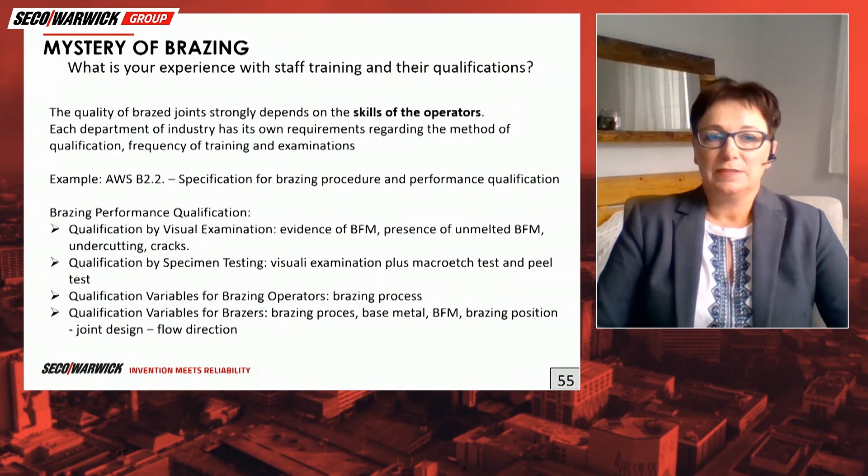The qualification is very important to avoid poor quality costs.

Irena, thank you so much. But for sure, in the market you can meet also other specifications, not only American Welding Society specification, but this is, I would say, the most popular in the aviation industry.

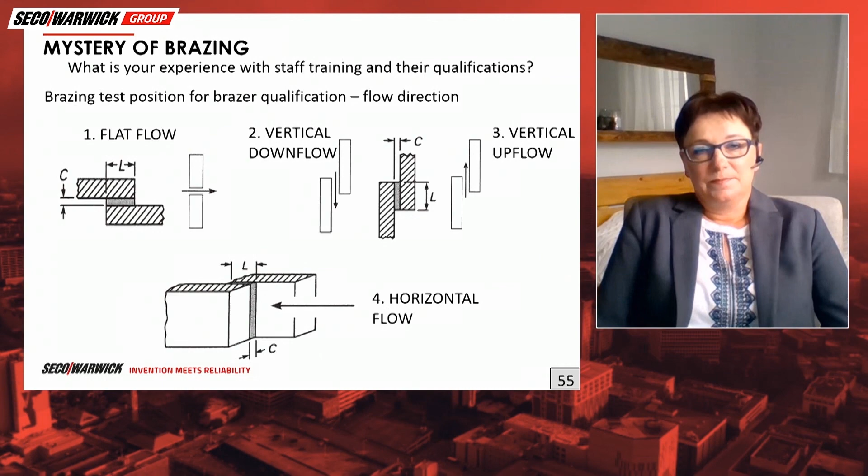Yes, I wanted to say that it's always interesting to me to know your point of view from the aviation perspective, where not only equipment has to be qualified, but also the skills of operators and generally staff has to be qualified too. I would say also that although the variables, the joint is not changed, we have to repeat periodically the training of the personnel and the exams - so every year they are trained and examined.

This is true. Many times I say that it's not only the equipment that is important, because we go to the modern world of also artificial intelligence, but also the intelligent operator is not less important than the good equipment we have for brazing. Irena, thank you very much.